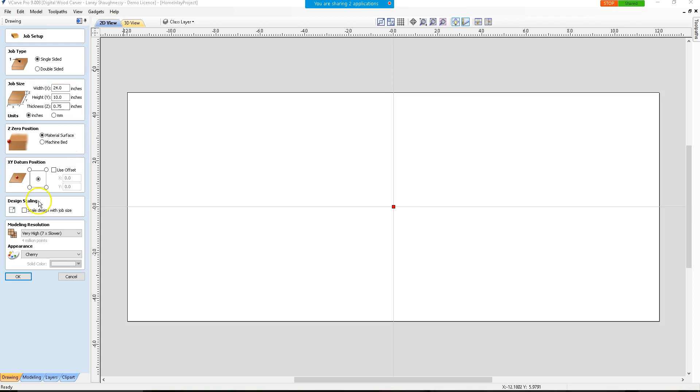So you'll be creating two separate projects for that male cut, but everything you're going to see in here, you're going to see me creating them side by side. I'll keep reminding you guys of how we'll create that second project, and I'll show you how we can do that. So I'm going to be working off the top of the material and off the center. Let's go ahead and click OK and get into here.

So there are two ways of creating inlays, and let's move over to the toolpath operations, because these are the toolpaths we're going to be working with. We have the inlay toolpath for your traditional style inlay, and this is called the auto inlay toolpath, and I'll explain to you why it's called the auto inlay toolpath. But we also have an option of doing what's called a VCarve inlay. A VCarve inlay gives us the opportunity to get really nice detail and really sharp points on our design, and it uses a V-bit, unlike a traditional inlay that would use a straight bit.

So let's pop back over here, and let's talk about why the auto inlay toolpath is the way to go when we're doing inlay. So I'm just going to create a letter here real quick, and we'll just do the letter H. Make it about 2 inches tall. Make that a little bit bigger so you guys can see what's going on here.

Okay, so let's imagine, and I'm going to make a copy of this. While I'm in transform mode, I'm holding down the control key, and I'm going to come in here and just drag a copy off to the side. And so the one on the left will represent our male part. The one on the right is going to represent our female part. And the one thing that I want to show you is, if we were to think of this, we're cutting a part out and we're cutting a pocket, right? We're cutting a profile cut and a pocket.

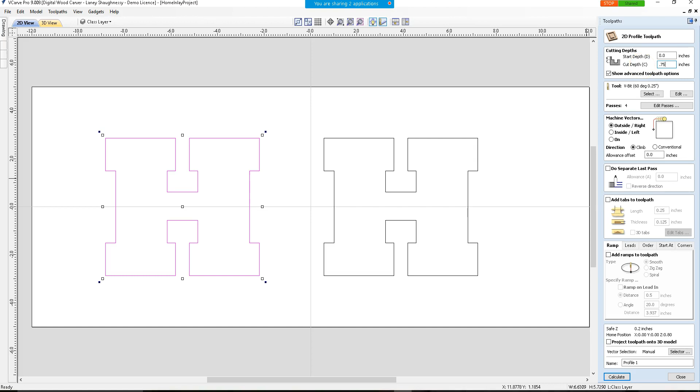The only problem is, if we just use the regular profile and pocket toolpaths, we have issues because our router bits are round. So let me explain to you what I mean by that. We have these nice sharp corners here on this H, and if we were to carve this out, on our inside corners here on the H, here, and here, we're going to have a radius. So if I were to create just a profile toolpath on this, and let's cut all the way through my material, and let's use a 1/4 inch end mill, that's fine for this.

Oh, hold on. The screen went black. Are we still grayed out? Screen is black. All right. Hold on a second.

Stand by, guys. Let's see here. Load. Are we still gray? Other than the two little gray boxes... All right, still grayed out. Okay. So I'm just going to do a... We back? Are we back in business, everyone? Okay. Let me move a couple of things off my window here. All good. Okay, great. Thank you for letting me know. If anything like that ever comes up, definitely jump up and tell me. All right. Stand by. Let me grab a couple of more things. Okay, so we are good to go. Everybody can see us now.

What I was saying was, if we were to just simply use a regular profile toolpath and a regular pocket toolpath to try to create this inlay, we would have major issues. And what I mean by that is when we do a profile cut and we're cutting outside an object, if this was my male part here, I'm going to get sharp corners on the outside corners, but on these inside corners here, like I have 4 inside corners on this H on these 2 lower parts, they would be rounded. And let me demonstrate that.

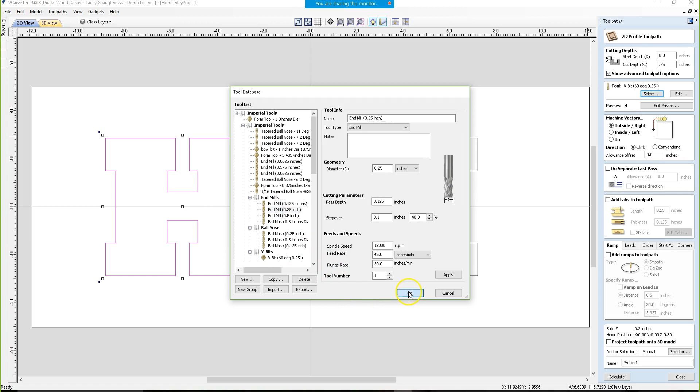So if we go through my material, and I'm just going to use a 1/4 inch end mill, outside of the cut, and I'm going to keep all the default parameters here and just calculate this. And let's go into straight on view. If I were to preview this cut and zoom into it, we can see that on these inside corners here, they get rounded because of the radius of the router bit. And that would cause us problems with fitting in to our female.

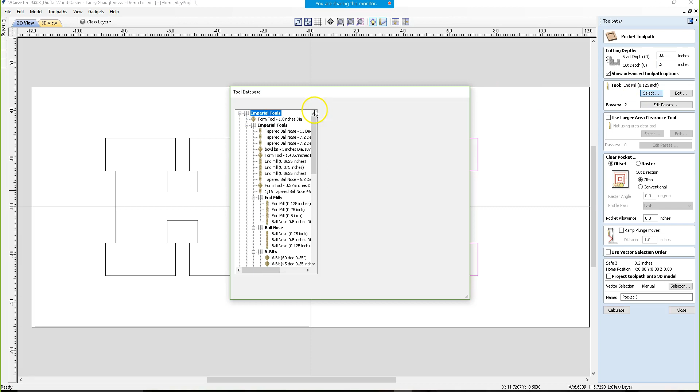So let's create that female pocket just using the straight pocketing toolpath. And this one will go 0.2 deep. Always use the same bit that you cut your male with. So I'll use a 1/4 inch end mill. And I'm going to just keep the default parameters here. And if we previewed this toolpath, let it finish pocketing out to that depth. Should have done it in one pass. You typically want to do it in one pass so you don't have a step down.

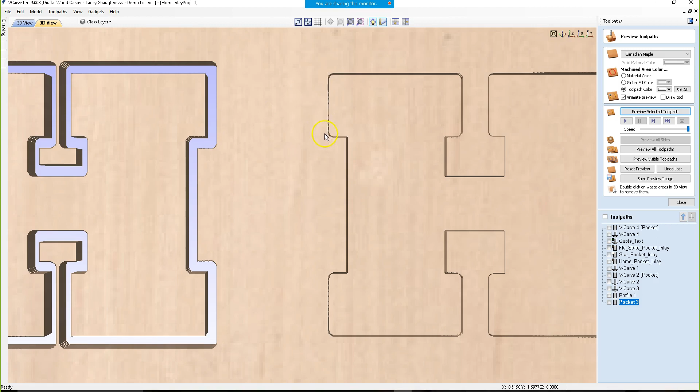But now if we look here at the female pocket, we have these sharp corners. So as of now, we have a mismatch. And then our outside corners, which are square here on the male, are rounded on the female. And so it's a mismatch. Well, we have the fortune of having what is called the auto inlay toolpath operation. That's this icon that's on the top row of your toolpath operations. And the auto inlay allows us to create our male and female part, and it takes into account and adjusts for the radius of the router bit.

So if we go back and create our straight now using the inlay, notice I have 4 options here. For the male part, we have a straight and a stepped option. And for the female pocket, we have a pocket and a hole. Now I'm going to just talk to you about the straight and the pocket right now, and then we'll come back and talk about the step and the hole, because that actually is a whole other neat little creative thing that you can do, and we'll do that one in just a minute. But let's start with just the regular straight inlay.

And so we're going to click our male inlay, and again we're going to cut through the material, and of course I've got this material set at 3/4 of an inch. I'm going to use the same 1/4 inch router bit, 1/4 inch end mill. Outside of the cut, I'm going to keep all the parameters the same, and we're going to calculate this. Now, if we were to preview this toolpath, we can see that once it cuts out, if I zoom in and move over, the toolpath has accounted for that rounding of the corners instead of getting sharp corners.

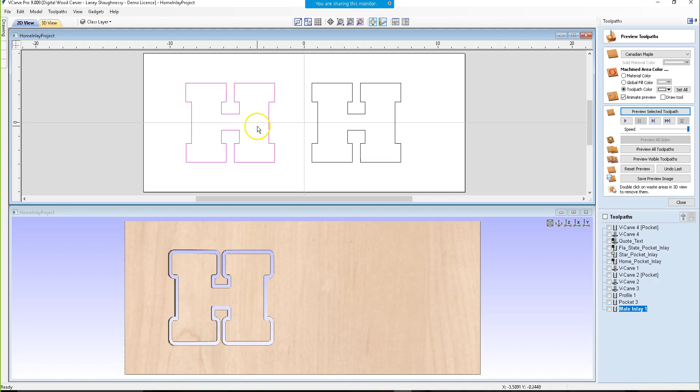So now we have that radius all the way around, and this is best viewed if we look at it in our split screen view. So if I go into split screen here, and if we look at this toolpath in a solid state, bear with me a second, let's go back into preview there, you can see the toolpath and where it's nipping off this corner here and coming in. It's showing you the radius and everything. So it's accounting for that 1/8 inch radius on a 1/4 inch bit already.

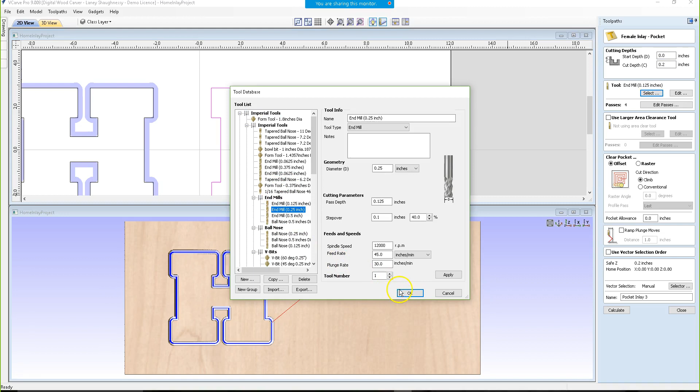Now let's go ahead and go through and create our female inlay. We're going to do a female pocket. And I said male pocket earlier, I meant male profile. Sorry about that. Again, we're going to go 0.2 deep using the same 1/4 inch end mill. I'm going to leave the default parameters the same here, and we're going to calculate that.

And now if we look at the 2D view, you can see this blue area, by the way, is a solid state. So if you have version 9, if you ever see those arrows and lines on your software showing you the toolpath, that's the wireframe mode. You can view solid mode too.

But if we look in here now, we can see that rounding of the toolpath. So we're going to end up with that perfect fit. It automatically accounts for the male and female. It knows that we're trying to get this part into that part, and it accommodates it so we can have a perfect fit.

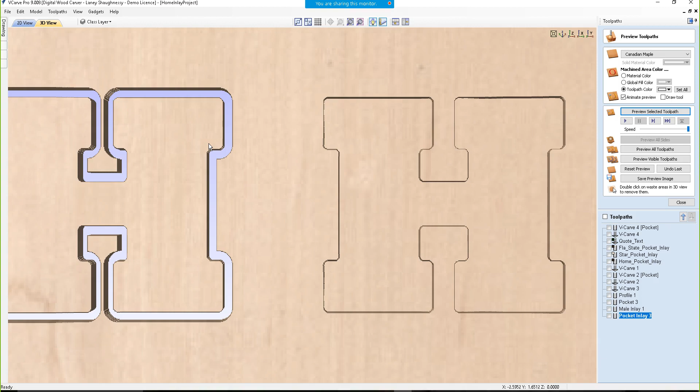Now if we preview the toolpath down below, I'll maximize my 2D view again once it finishes cutting out that toolpath. We can now see that on our outside and inside corners and everything, we have a perfect match. Now, when it comes to using the auto inlay toolpath, it's going to be a very tight fit depending on your machine. Now, you guys are all Digital Woodcarver customers.

Inlays, accuracy, and how tight the fit is all depends on the accuracy of the CNC. On the Digital Woodcarver, you have a tolerance, which really doesn't mean much to you, of 3/10,000ths of an inch. You have an accuracy, if you were moving back and forth, where it lands in that same spot every time. You have a resolution of about 5/1000ths of an inch, but that 3/10,000ths of an inch

is pretty tight. But tolerance isn't the word, it's resolution. I'm sorry, 3/10,000ths of an inch resolution. That doesn't really accommodate anything. There's nothing we can equate that to in a project. Tolerance, like if I were to set my XY zero and move the machine to one end of the table and come back, you have an XY tolerance of about 0.005 of an inch, which is pretty tight.

But some machines like the X-Carve, where the tolerance is not tight, couldn't get away without having to create an allowance. And what I mean by that is, if we look at this toolpath here, we have the option on either the male or the female of creating an allowance. Typically, for the Digital Woodcarver, I would go with a 0.005 or 0.010 of an inch allowance.

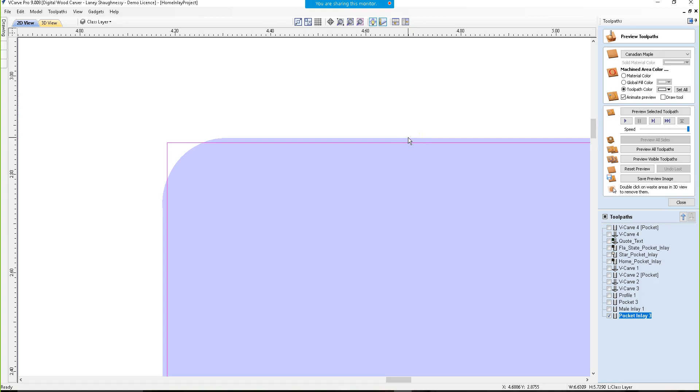Your allowances on your female are going to be outward, and the allowances on your male are going to be inward. So it's one or the other. Typically, you do not put an allowance on both. I'm a big advocate of putting the allowance on the female and not the male, because rule of thumb, you always cut your male part first, so that while the female is cutting, you can come over to your table and do a test fit.

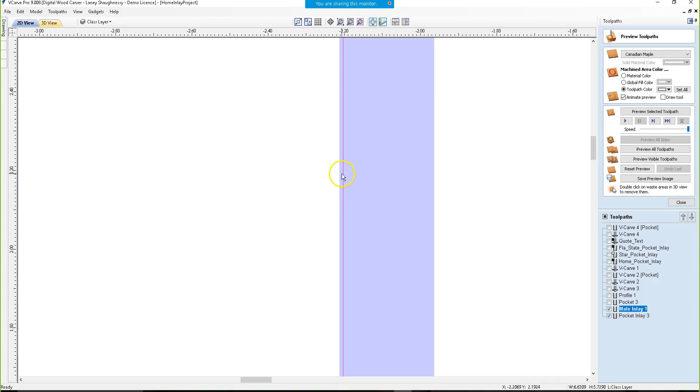If the test fit is too tight, then you can add that allowance, make that pocket a little bit bigger, and run that toolpath again until you get that perfect fit. And notice on the male here, we are actually making the part smaller with the allowance. So you can either add the allowance to the male or the female.

I am a big advocate of using the allowance on the female part, because you cut your male first, bring it over to the table while you're cutting your female, and when that female finishes cutting, do a test fit. If it's too tight, recalculate the toolpath, giving yourself a little bit of allowance. Run that toolpath again, and you don't have to run the whole toolpath. You can just run the last profile pass to widen it up a little bit.

Test fit again until you get that perfect fit. Once you get that perfect fit, and let's say our allowance is 0.010 of an inch, you can pretty much guarantee that's going to be the allowance you would use each and every time.

And so the allowance will help just kind of widen things out on that female, which is visually shown here in this 2D view.

Okay, now that being said, let's talk real quick about the step inlay. So let me turn these off. The step inlay is cool. I don't know if you guys and girls have ever seen a project. Basically what we would be doing, if you look here at the toolpath, if you can see this little icon, we'd be cutting a hole all the way through. That pocket would be cut all the way through our board, our material.

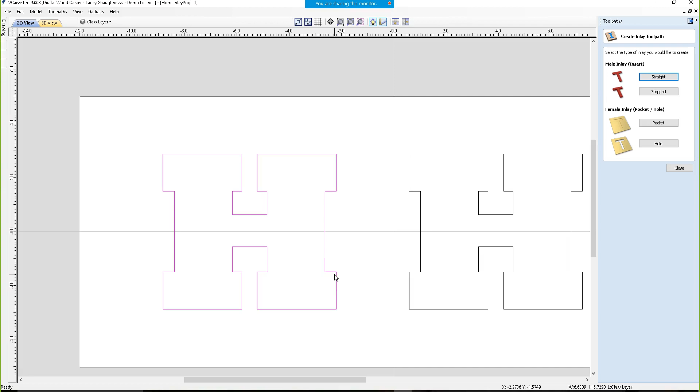So let's do that. Let's create a stepped inlay for the male side of this H, and my cut depth again is going to be 0.75, cutting all the way through. Now let's choose the tool. I'm working with a 1/4 inch end mill here. And by the way, your radiuses and all that stuff, it is bit based. For your smaller projects, a 1/8 inch end mill is what you'll typically be working with.

And typically you're not cutting a male part out of a 3/4 inch board. It's usually a thinner piece of material, because you're only cutting the female pocket to about 0.2, a little under 1/4 inch. But let's go with a 1/4 inch end mill. Now we have a new window here for this step. It's asking us what our step depth is going to be, and it's probably hard to see, but in the little graphic here, the step depth is from the top of our board down.

And one way that we can do that is, I usually leave about 0.2 of an inch or so of a lip. So I can use a shortcut, and I can say D, which is the depth of my project, and I can say times, oh wait, hold on, there's an equation. D for my depth minus 0.2 equals, oops, syntax error.

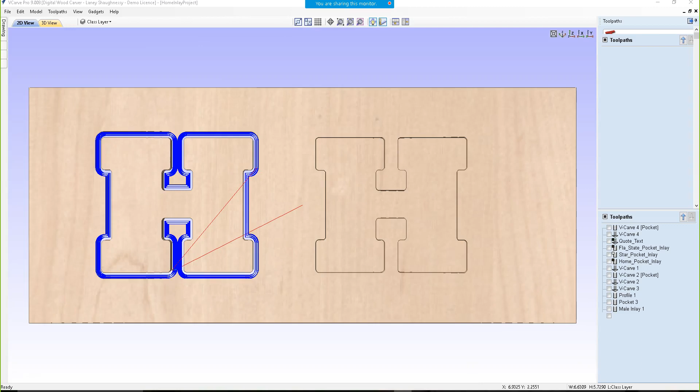I'm an idiot. Everything can happen when you're live. I'm going to take a look at what that equation is. Gosh almighty.

There are, by the way, options for, where is it at? View, help. Right here, keyboard shortcuts, which is what I'm opening. It's a list of all of the keyboard shortcuts to show you what they are. But anyway, let's preview this selected toolpath. I tried to be fancy and show you a neat little trick, and I didn't even know how to do it.

Now notice what will happen. Watch here as it cuts this male. It's going to be quite a few passes. I've got my bits set for an 1/8 inch pass at a time with my 1/4 inch bit. I'm not aggressive with my bits, so give it a second to calculate that. We're almost done.

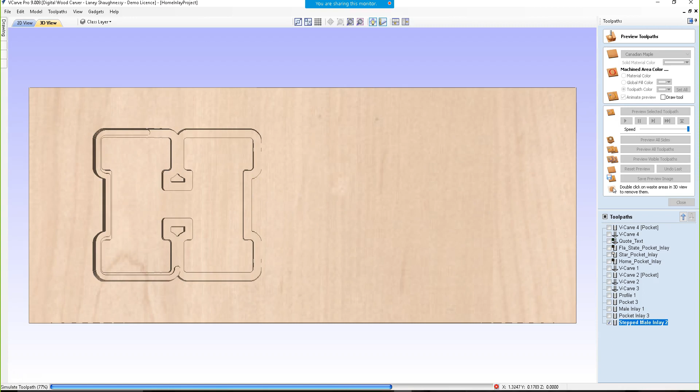All right. Now if I delete this and we take a look at this part, notice how it's created my inlay part, but it's left this lip. And the lip is so when it slides through the hole in the back of our project, where we're cutting out the female part, it stops it. It's kind of like a stop. It's also room for glue.

You'd put a bead of glue in there because it'd be glued in from the back. And you typically have this male a little bit thicker. Let's say if I was using a 1/2 inch board, then my male would be cut out of about a 3/4 inch board. So that way when it sticks through the hole, it's protruding above my board about an 1/8 of an inch or a 1/4 of an inch. It's just giving it that raised up contrast wood.

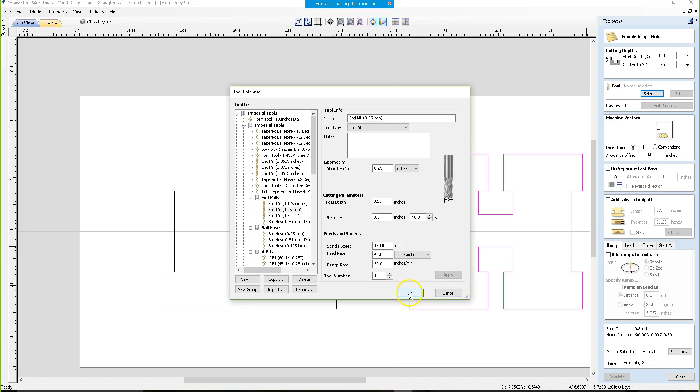So let's cut the female real quick. And with the female, it's a very simple hole. Again, we're gonna go all the way through my material. I'm gonna use my 1/4 inch end mill. And I'm gonna set this pass depth to a 1/4 of an inch, just to speed things up. We're going to be on the inside. No allowance right now, but again, if you need to make it a little bigger, put in that 5 thousandths or 10 thousandths allowance. And I'm going to leave all the defaults the same, and I'm going to calculate this.

And let's reset our preview. And now we can preview our female getting cut out, and I can get rid of that waste. And again, if we preview our male, we can see our 2 parts, and our male will fit inside of the female all the way through it, again being stopped by that little lip on the back. And it's a really neat thing. Signs for kids' rooms and all kinds of stuff. It's typically used with acrylics.

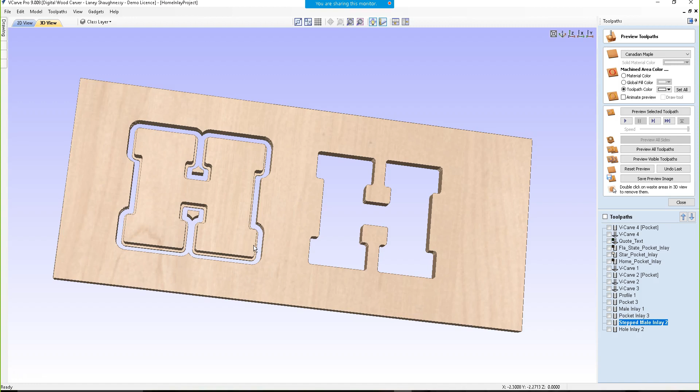Let's say that we were carving an aluminum or a wooden sign, and then we had some thick acrylic that we were going to backlight. We would cut the male parts out of that acrylic, and it would come in through the back, and then we would put LEDs and stuff and make a very cool looking sign. But that is our traditional auto inlay toolpath, just an overview of them. They account for the bit, because it knows we're trying to fit this part into this part, and it accommodates for the bit on both parts, so we get that perfect fit every time.

Now, stand by, because if you're asking me questions or anything right now, I do not have any of the windows open so I can view what I was trying to view. I cannot believe that I didn't know it.

All right, while that's doing that, let's go back in here and delete these. And let's open up a project that I've created. Now, one of the things that you're going to get out of this class, you're going to get a file of vectors for every state in the United States. Every vector outline for all the states. I'm going to provide that file to you as a gift, as a thank you. And this is one of the signs that I really like to make. The state itself is inlaid. I use maple. The state itself is pocketed out, and then the male is cut out of walnut. And then my star would be another piece of maple. And then my home is walnut.

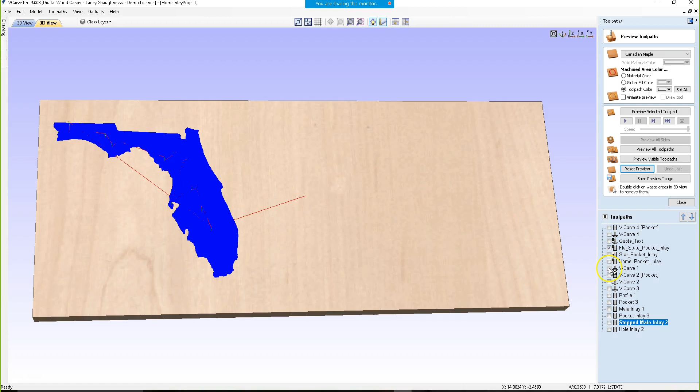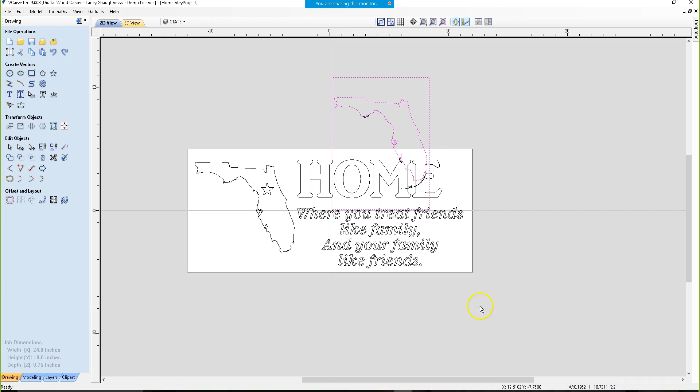we're going to move it to the class sign layer. Now notice I only grabbed the state. I didn't grab these little islands and everything because they're not going to be part of my inlay. So I'll just end up deleting those in a moment. But now we can turn that layer off and we're back in business.

So again, let's get everything out of here. So these images that come in, they're going to look like this. I'm going to F9 to center on my project. You don't need the outside frame, of course, so just delete that off. And you'll have all the states and vectors and all. Now, if we take a close look at this, you wonder how in the world is it going to inlay this little island or tributary or peninsula, whatever you want to call it, this little thing sticking off the state.

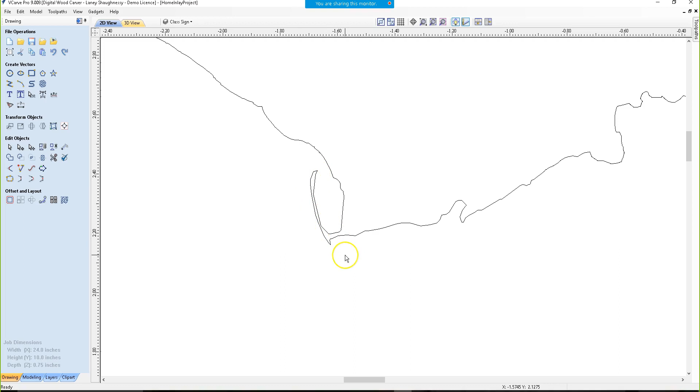Well, if I come in here and I create the toolpath for it, and I'll just use a regular inlay toolpath, straight mill, again cutting through my material, 1/4 inch end mill, and calculate. Actually, that was idiotic of me. I'm going to stop that. Wrong bit. I would not ever use a 1/4 inch end mill for this. For my state of Florida, I would use a 1/16 inch end mill, but an 1/8 inch end mill would do fine as well.

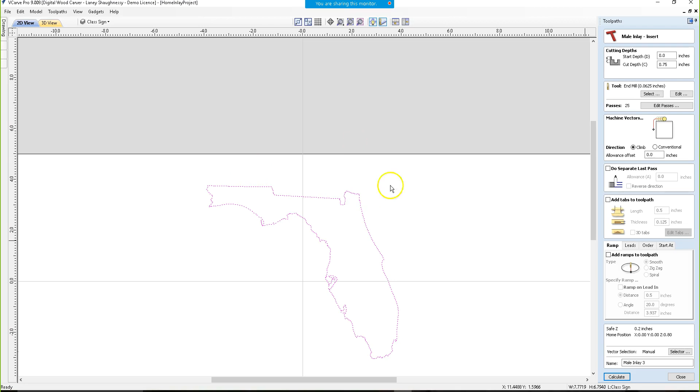So I'm going to do this in one pass. I'm just setting this as one pass to make things quicker for the demonstration, but I would not run my 1/16 end mill 3/4 of an inch deep in one pass. So I'm just going to calculate that, and this is just for one more time. Edit passes. 1. Set. Okay. Calculate.

It'll take a second to calculate that. It always, for some reason, takes me longer to calculate when I'm running a class. I don't know why. But let's reset our preview. And now if we look here, we can definitely see a better view of it in the 2D view. So let's actually go over to the 2D view.

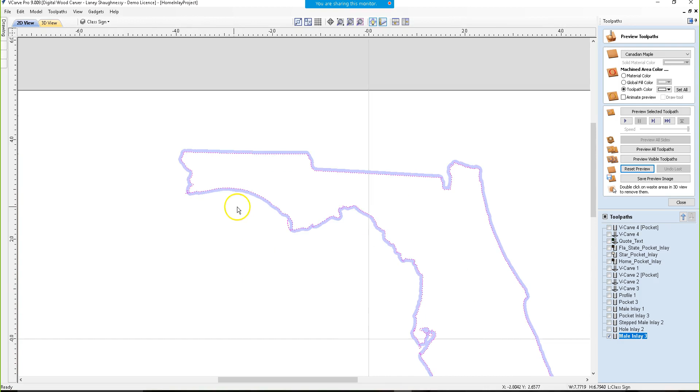And if we look here, you can see where it's compensated for the radius of that bit. So it's cut that peninsula off. Okay. So we're just going to get that rounded profile and everything. So if we look at our 3D view, you can see that peninsula is gone. So it automatically kind of accounts for that. Just keep that in mind.

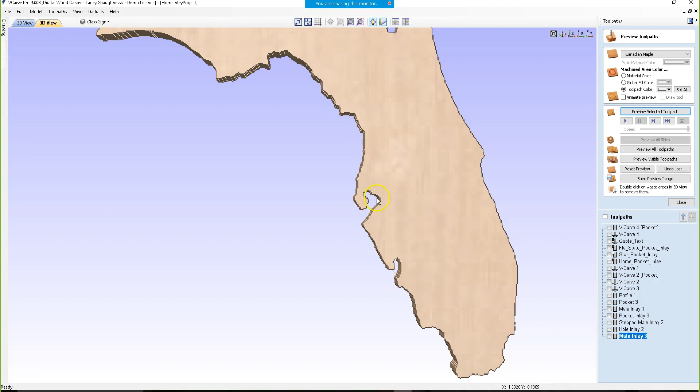Any little tributaries or whatever you want to call them, they're not going to get cut unless you have a micro bit to fit in. So if I were to remove the waste material, let's get it into full view so you can all see it. This would be my male inlay. And I still get good detail on the state and everything. But those little twigs sticking off, it's not going to cut. So just keep that in mind.

You're not going to get 100% exact on something that's so detailed as this. Now, again, we're still using the traditional auto inlay toolpaths. We haven't even covered VCarve toolpaths, which is completely different. So these states, basically what I did from here is I created my toolpaths, and let's go into full view so you can see what's going on.

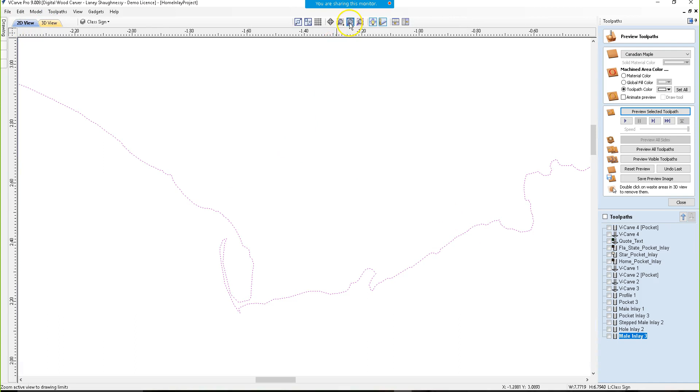I don't know why I keep clicking everything. Bear with me a second. Okay. What I'm trying to do is move this over to where it belongs. All right, now text. Inlaying your text. Let's go over and create some text. I'll just create the word home for this.

My computer must be struggling for some memory now. Gotta run. Thanks. I'll watch. Thanks, Ronnie. Sorry. Am I running over? No, we're still at 7:40.

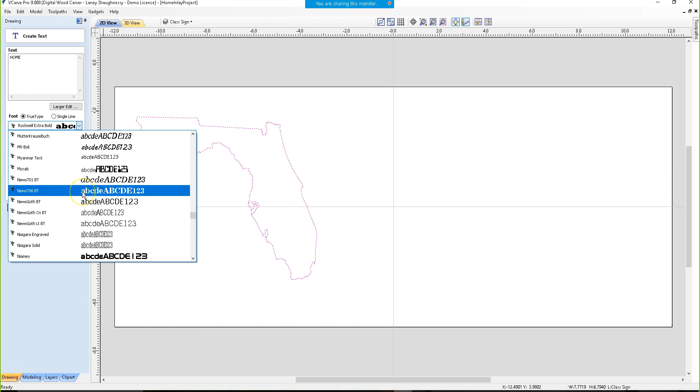Home. And for this tool, I will use... what's a good one to use here? And again, just know that when you're creating your sign, your sharp corners here are going to have a radius depending on the size of the bit. So if you want a very non-noticeable radius, use a smaller bit. Use your 1/8 inch bit.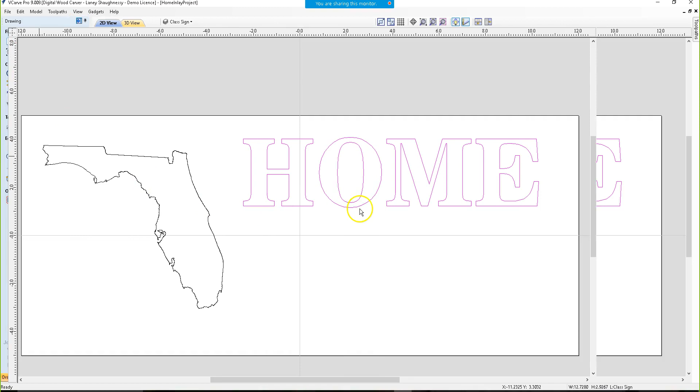If you use a 1/4 inch bit, then you're going to have a wider radius. But you do not have to go into this text and change all these corners or anything. That auto inlay toolpath will do it for you. So if I were to come over here, I'll just do the pocket for this one. Come in here and create that pocket.

0 start depth, 0.2 cut depth. I'm going to use an 1/8 inch end mill. I could stick with the 16th, but that's too small of a bit for pocketing. I could use a 16th and an 1/8 inch or a 1/4 inch, a larger area clearance tool. If you have a big area to pocket out, definitely a time saver, but that does include an additional bit change. So if I calculate this,

and if we reset our preview and preview it, we can see here that on the outside and inside corners, it's accounted for the radius of that bit, and it's rounded those corners off, knowing that we're about to try to fit a male part into that. So by a show of hands, how many of you got that, and we can move on to VCarve inlaying? Do me a favor and just raise your hand so we can move on.

All right. Todd or anybody, Larry, Ken, if anybody has any questions, if you ever want to try an inlay project, pick up the phone, give me a call. I have no problem walking any of you guys through your first inlay project, or multiple inlay projects. I have no problem being there to help you out. So let's clear that.

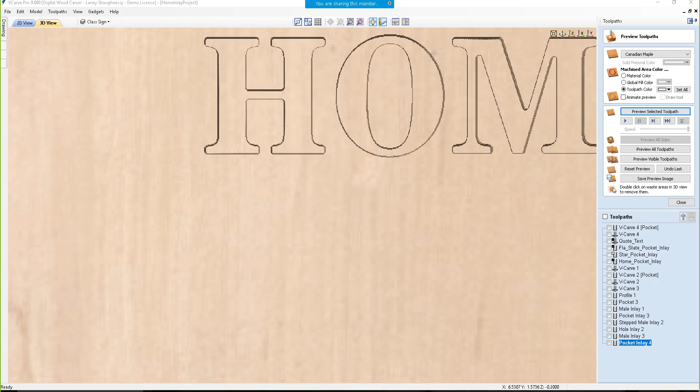All right, let's focus on VCarve inlaying for a minute. VCarve inlaying is very cool because now we are not limited. We don't have the radius anymore that we have to contend with. We can get very sharp corners. We can get very intricate in our detail. Notice on this owl here, we have some very sharp points, and we're going to be able to maintain that detail.

Now what you see here is I've got my female pocket on the left this time, and the male on the right, and notice that the male has this border around it. And again guys, I'm creating these male and females out of the same board. We would not do that. You would actually create a whole other project for your male, cutting it out of the proper thickness material and the proper size. You don't want to cut it out of a big board. Cut it out of a board that'll fit.

So if I were to open a second instance, right-clicking on my little Vectric icon down below on my screen, and open a second VCarve program, I would let it pop up here. Oops. Let me close some of these windows, guys, because we're having some lag. Okay. I would come in here, create a new file.

This file would be a... Oh, I am lagging, seriously. 10 by 6. And cutting it out of a, you know, my pocket is going to be 0.2, so I might be cutting this out of a 1/4 inch board, a 1/2 inch board. The thicker you go, the more you have to sand it flush. Or you have your CNC mill it down. I would cut this out of a 1/4 inch board,

and I can come in, click OK on this, and I can paste. Oops. I had the wrong one copied. Let's go back over here real quick. With that selected, I can copy it from here and paste it into here, center it onto my board, and this is what I would create. I'd create my male inlay toolpath and cut it out.

Even for the VCarve as well, because we're going to actually use the VCarve. This is the VCarve tutorial here. But when it comes to traditional, this is what you would do. You create a whole separate project to cut it out. Now, for my VCarve inlay, my project needs to be a little bit bigger. So I'm going to give myself a little bit of room, and I'm going to go 11 by 7.

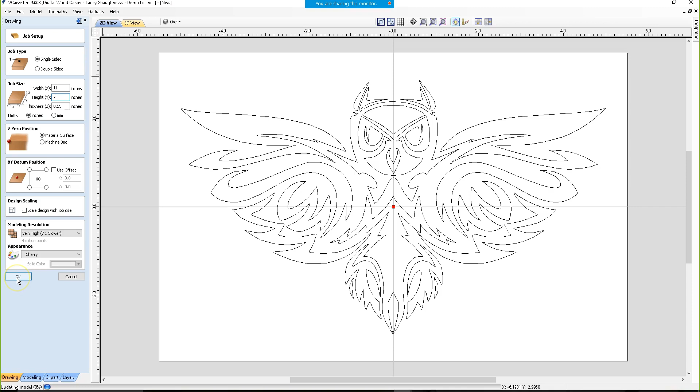Because I want to create a boundary, and I'm just going to draw a rectangle around this, snapping from one corner of my board to the other, drawing that rectangle border. And I want to create a boundary around this because when a VCarve cut gets done, it leaves a male behind.

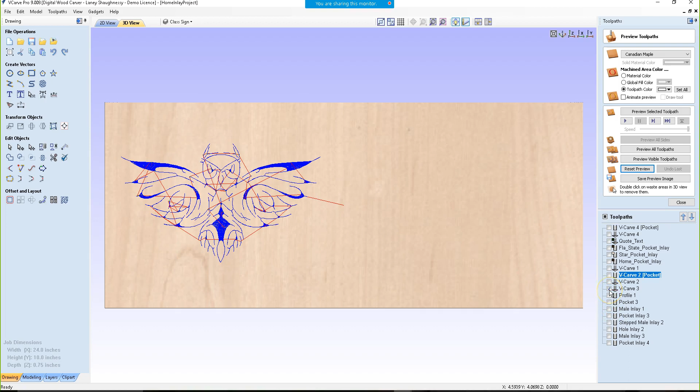So let's see if I can give you an example. I don't have a visual. I do have a visual. What am I, an idiot? I created the toolpath. Let's go over here. Sorry. I don't know why I got flustered there for a second. VCarve. Pocket. Let's see here. This is my... No. Oh. Bear with me a second. All right. This isn't the owl, but don't get confused.

Preview selected toolpath. When we have that boundary around our male part, the back of the board is still going to be attached. It'll basically still be attached to that board. And when it VCarves, of course we'd be carving this out of a smaller board, but we make sure that we have no lip around here. You take it to a table saw or a bandsaw, cut it out, because this whole backer and everything is going to flip and fit onto and snap into your female part.

And if I can pop open a window real quick, let's see if I can do this. I'm sure many of you guys and girls might have seen what a VCarve inlay looks like, but let's see if I can get a picture of it. VCarve inlay. There is a PDF tutorial. This method of VCarve inlay was created by a couple of guys named Paul Zank and Damien Durant.

And they actually have a full PDF, which is here, this VCarve Inlay project, that is printable. It's 13 pages that walks you through all the steps. The only thing is I think the PDF actually has a typo because of their cut depth and start depths, and I'll show you that in just one second, but I want to show you... I should have had all these windows open and ready for you guys.

And while that's loading, when cutting an inlay, would you adhere the veneer to a wasteboard or sandwich it between sacrificial?

Debbie, if you're doing a veneer, it's going to be that thin, but our inlay pocket is almost 1/4 of an inch thick, 0.2. You can go 1/8 of an inch. You can go 1/16 of an inch. If you were going to do it with a veneer, then yes, you would sandwich it between 2 boards so it doesn't tear out. But the male is going to be actually pretty thick, especially on a VCarve inlay.

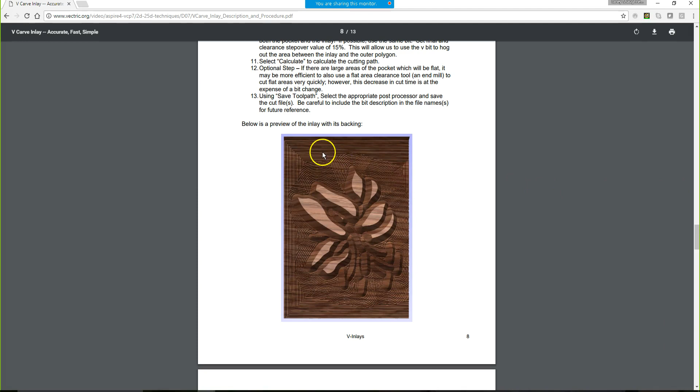Okay. So when that male gets cut out, it stays on the backer, and all the parts remain intact. It doesn't cut all the way through like you would think, because when these 2 parts come together, the male and female are going to snap together, you'll hear a nice little satisfying click. They click together very nicely. And so when they're done, there's a space.

If you can see on page 8 here, this cutaway they did, there's a space between the male part and the female part where you can run a handsaw or a bandsaw to separate them. When you separate them, you would just sand that flush in your female, leaving you with your inlay. So that male backer is not going to get cut through like it would with a traditional inlay. You're not cutting the male all the way out.

So if we come back over here with our owl, I want that border around, and one very crucial step is I need to mirror the male, because think of 2 slices of bread coming together. Those 2 parts coming together, we need a mirror copy of it. So I'm going to just flip it and mirror it. You didn't see any real movement there, just a quick shift, but it is now a mirrored copy.

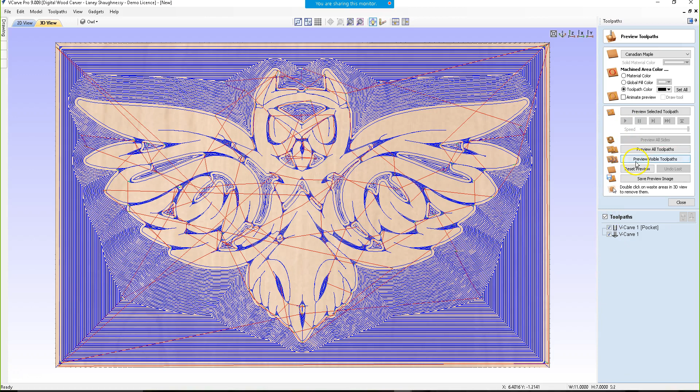I'm going to use a 60-degree V-bit for this. You don't have to use a flat area clearance tool to flatten all of this area out. The V-bit will do a good enough job, but it makes it a little bit longer run, so I like to use a flat depth, and I can calculate this toolpath. And if we were to preview this, you can see that this would be my male part.

And yes, Ron was asking, do you have to reverse the male image so that it'll fit in the female? Yes, you do.

So this is my male part, and notice on the edge of my board I have this little lip. I would cut it off with a chop saw, miter saw, run it through a bandsaw or my table saw. We just want to cut that lip away so that it's not there. And so this would be our male part. Now let's pop back over and create the female part.

And this is my female part. My male, remember, has the boundary around it. So if I calculate VCarve Inlay, the female toolpath is going to have a start depth of 0 and a cut depth of 0.2. Basically, with the 0.1 and 0.1 of the male, we are splitting this 0.2 depth in half. So our female goes to a depth of 0.2. Our male starts at 0.1 and goes to 0.1. Again, I'm using a 60-degree V-bit. I do not need a flat area clearance tool on this.

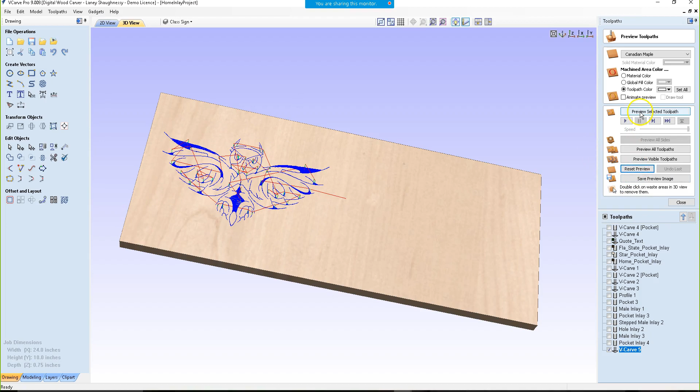And if I calculate this, reset our preview and take a look. We've got our female here. The reason I don't need a flat area clearance tool is because the V-bit will flatten that area out as well as it needs to be. That room down below is for my glue. It's going to be hidden. So I don't need to waste time changing a bit for that.

So my female cut, and just for kicks and giggles, this has already been mirrored with the boundary around it. Let me quickly create the male here so you can see them side by side. VCarve toolpath, 0.1 start depth, 0.1 cut depth, 60-degree V-bit. I will use a flat area clearance tool on this.

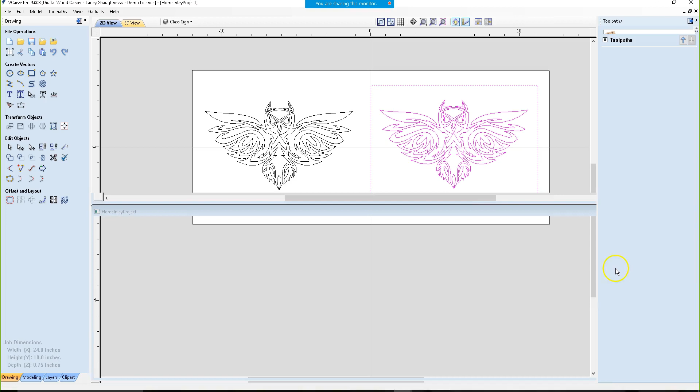And calculate. If we preview the visible toolpath, you'll see the male. And so what the VCarve method does, and see this angle. By the way, 60-degree V-bit, 90-degree V-bit, 120, doesn't matter what angle bit you use, the same bit for both the male and female. I really like and prefer using the 60-degree V-bit, but in that PDF, and I'll provide a PDF in the project files too, they use a 90-degree V-bit, but it doesn't matter what angle. You just use the same bit for both the male and female.

And why the VCarve Inlay is such a great method is because, one, we get these nice sharp detail corners. We don't lose or sacrifice any detail by the radius of the bit. And the angle of that cut, when those V walls fit together, it will push down and, like I said, give it a nice little satisfying snap together until those walls meet, and it will stop. And that's it. And it gives you a nice, clean VCarve inlay.

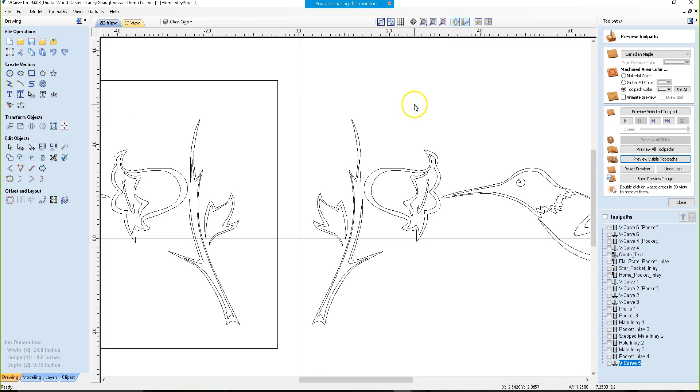And you're really not limited on the type of projects that you would inlay with a VCarve toolpath. With traditional inlay, we can't have a project that's too detailed. So for instance, if I were to turn off the owl here and show you our hummingbird, notice on this hummingbird we have some very small lines. First of all, it's very thin, very small to begin with. So we're going to get some very thin detail in here.

If I was doing a traditional inlay, I wouldn't be able to do it with this, because I would have to have a very small bit, or else it's going to cut this project back to where that bit can fit. Well, with a VCarve inlay, I have the ability to create this detailed project. So again, female pocket, the male is mirrored with a boundary around it. The boundary doesn't have to be a rectangle. You can just draw a line, you're just outlining it. Just give yourself enough room so the bit can get in between the design and that outline to flatten it out, but minimize your waste.

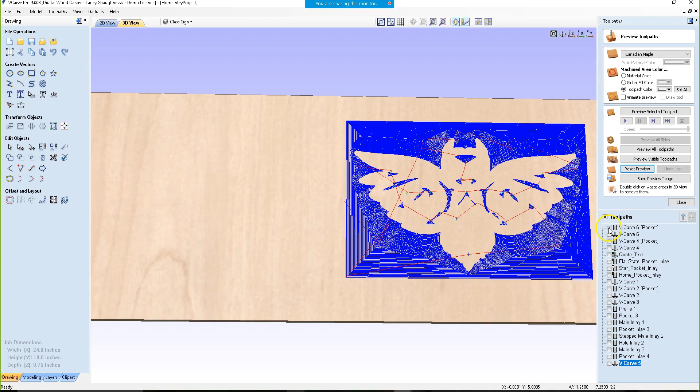But if we were to look at this hummingbird project, that's my owl, that's my Florida State, there's the hummingbird. There's our female pocket and our male. So we can get really nice sharp detail on these leaves and stems and everything.

All right. So, any questions? This will be best going into Q&A right now, because I can demonstrate better if there's any questions or any type of project. But just so you know, as far as your vectors, you can get vectors from anywhere, like your images, and when you trace bitmap to VCarve, if you're VCarving this, it pretty much could be inlaid. You can't get too detailed, but you know what I mean. So let's see what we have for some questions.

When you snap it together, I'm guessing you glue the female part first. After it sets up, could you run it through a planer and remove the excess? Well, you could, absolutely, for sure. I typically, if we look at our 3D view here, put the glue on the male. I'm worried about glue getting around my background here, because this is my project board. And again, this would be two separate boards, by the way. But I'm not worried about glue getting here, because all this backer board of the male is getting cut away.

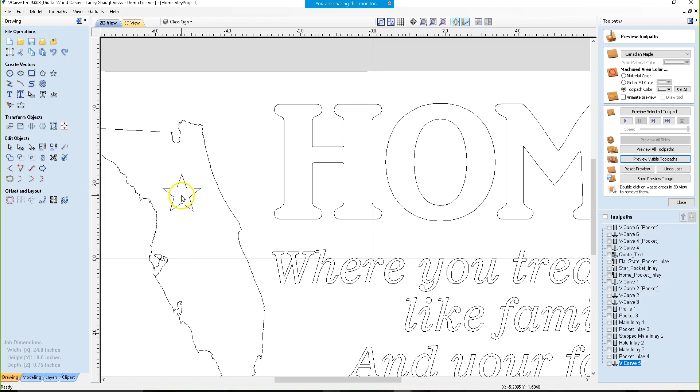vector here, a star. And now if I did the traditional inlay on the star, my points would not be pointed. They would be rounded based on the radius of my bit. But I could do a VCarve inlay on this star and get these nice sharp corners. So I could actually do a traditional inlay and a VCarve inlay. And some people prefer to just do the VCarve inlay for every project they do. I mix it up. It's just kind of a case-by-case basis.

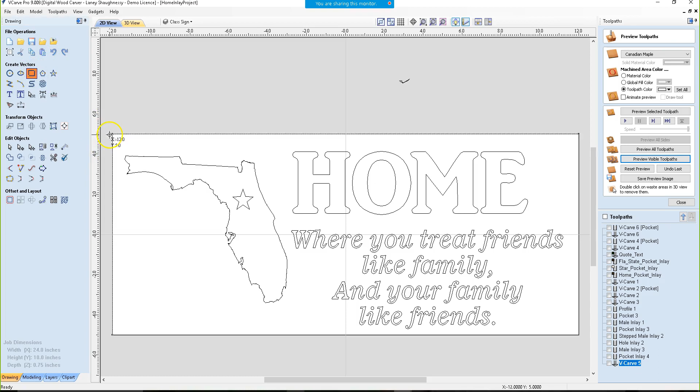How would you set a roundover on an edge? Good question. This, by the way, guys, and Larry, correct me if I'm wrong, we're not talking about inlay because you wouldn't do a roundover, but on the edge of your board, if you wanted to just do a roundover on the edge of your project board. So what you would do is, let's zoom out so we can see what's going on. We're going to create a boundary for our project board.

I just drew a rectangle. Using the rectangle tool, I snapped to this corner, held down my mouse, pulled it over, snapped to this corner to create that boundary. And now the key thing is you have to add a roundover bit

to your tool database. Thank you, Andy. I appreciate it if you're still with me.

And now the Vectric tool database does have a roundover defaulted in there, a 3/8 inch roundover, but you might not have a 3/8 inch roundover, right? So we've got to create that roundover. Let me delete this. So let's say I have a 1/2 inch or an 1/8 inch roundover or what have you. I'm going to draw that radius. So if I have a 1/2 inch roundover, typically when you say 1/2 inch roundover, it's referring to the radius.

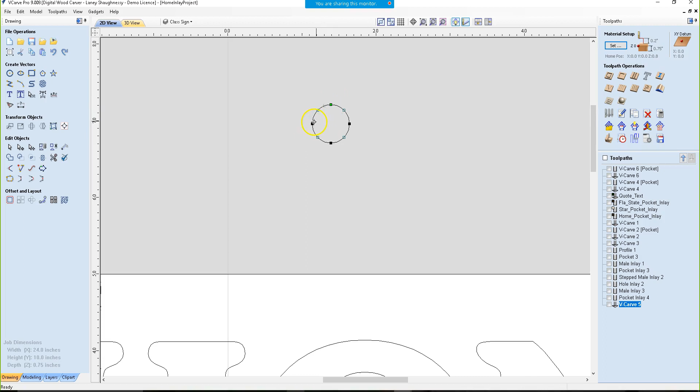So I want to make sure that my radius is 0.25. There we go. And I'm going to go into node editing mode. And we need this top right corner of this circle. So I'm going to cut the vector here and here. And I'm going to delete the rest of that circle. And this is going to represent my roundover.

Now my roundover bit would typically have a little bit of a flat area like where a bearing would be, or a cutter. So measure your bit and find out how wide that bit is, where it goes from one side to the other. You need to know what that is. And we'll just create, oops.

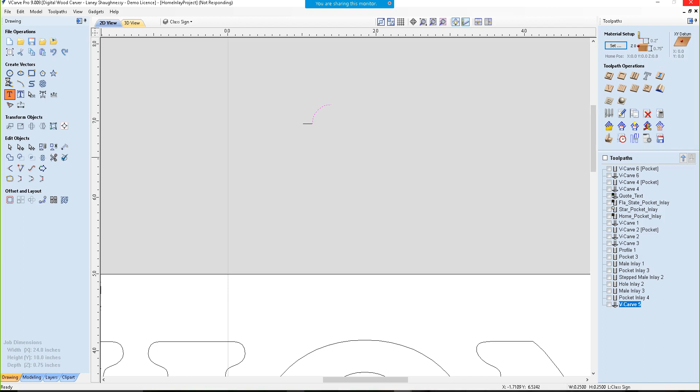All right, once I have the profile of my roundover drawn, I need to join those 3 lines together. I have 3 open vectors, I need to join it as one. And with that selected, I will now open my tool database. Over here, it looks like 3 router bits in the tool operations side. I will come down to New and click on Form Tool. And when I do, it will draw the bit out.

And now it's going to put in the diameter of the bit. The diameter is not our radius, by the way. That is just the width of that router bit. Putting it in there, it's going to fill in a pass depth and a recommended pass depth and a step over. And then we're going to come in here and put in our speeds and feeds. So 50 and 20. Click apply. I could actually run up to about 75 on this because I'm just doing a roundover.

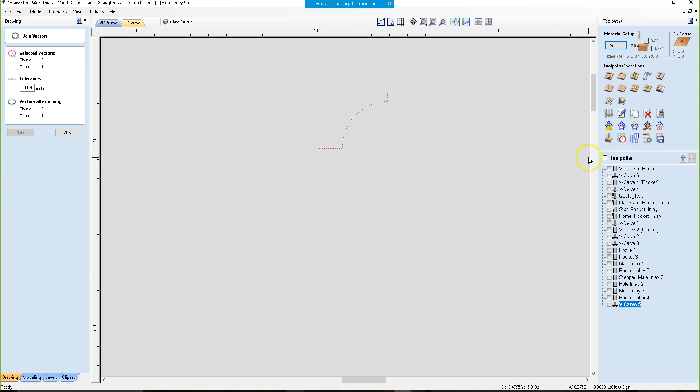But now we have that tool in our tool database. You have to add those form tools, those specialty form tools, your ogee bits, your roundovers. You got to draw those profiles. And sometimes you can find vectors of those profiles in different places and everything. But you got to draw out that profile to add it to your tool database.

Now, if I come over here and let's go back to our project, grab that vector and I'm going to do a profile toolpath. I want to cut only 1/4 of an inch deep. I'm going to choose my roundover tool. And I want to be on the outside of the cut, but I will be setting an allowance.

So right now, if I did it on the outside of the cut without an allowance, if I calculate this toolpath, oops, let's select our vector. If I calculate this toolpath and reset my board to a blank board, if we preview that selected toolpath, you're not going to see anything happen, right? Nothing's going to happen because it's got the bit on the far outside.

So I need to create an allowance, an offset allowance. And that allowance is going to be a negative. I want to go in. And I want to go in probably, I don't want to go in half my bit. I'm going to go in 1/4 of an inch. Calculate. And if we preview that selected toolpath, you can see that nice roundover.

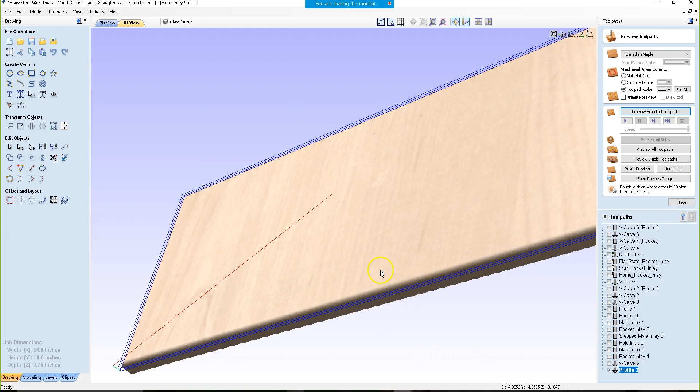So let's look in the 2D view at our toolpath here. We have to offset that bit. Otherwise the whole bit is going to be on the outside here. If we don't offset it, we're not going to get any cut. So that negative 1/4 of an inch gives us that nice roundover. And again, if I reset my preview and preview that cut, you can see that nice roundover that we're getting. Okay, that's how you would calculate and create a toolpath.

Who else lost audio? Anybody else lose audio besides Leonard? Leonard, is your audio back? Okay. We'll wait to see if Leonard's still with me. Okay, great. So you guys lost audio for a second.

Is there anything I need to re-explain on putting in a roundover bit in your tool database to create a roundover toolpath? The roundover toolpath, by the way, is just a profile cut toolpath. Just the profile toolpath. And again, you're going to choose your roundover bit. You're going to choose your cut depth. And you're going to choose your step over, your offset. And when I say step over, your offset allowance. Okay.

How do you set the Z for the roundover? You touch off your bit just like you do any other bit. You touch it off on the bottom of the bit, the very tip of it, the very tip.

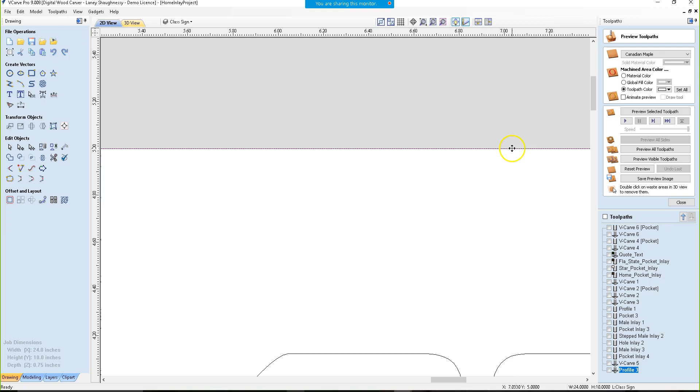All right, my vector line, it's hard to see that pink line and everything there. Let me turn this off, uncheck it for a minute. My vector line here is the edge of my board, you know, that I'm rounding over. And when I create the toolpath, I've got the toolpath set for outside of the cut, okay?

Well, if we look at our bit, it's not going to be in here. It's going to be on the outside of the bit on the one extreme or the other, left or right, depending on which side you're on. So it's going to have the outside of the bit cutting around that line, so it's not going to be cutting anything, right? So we have to bring that bit in so that we're getting that roundover cutting area. So we have to bring that bit in towards the wood more so we can get that roundover cut.

So again, looking at this toolpath in a solid state, that blue line, that's our tool, by the way. It's cutting on the outside. Well, I have to bring it in. So the allowance offset, I want to bring it inward. So it's a negative. I'm bringing it in a quarter of an inch, which is about the size of my radius. If I calculate that and we look at our 2D view, it now brings that tool in that quarter of an inch. So now we're actually cutting some wood.

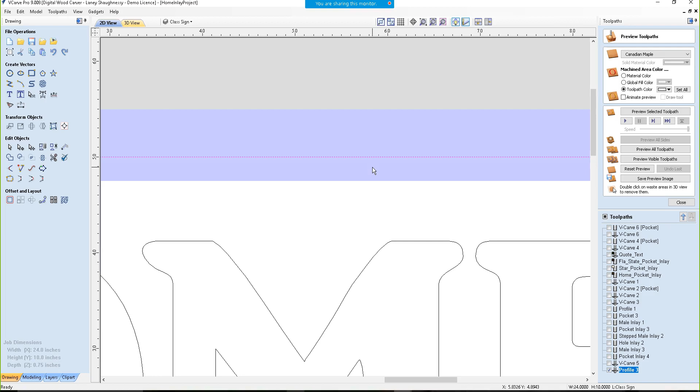Did that clear up the confusion a bit, Larry? Or still got a question on it? All right, Larry's okay. Yep, you got it. Okay.

And it's the same thing when we were doing the inlays, guys. If we were creating that inlay pocket with no offset allowance, then my router bit, if we come in here and look, it's going to be cutting up to my line. And then when I cut my male, it's going to be a very, very tight fit. You'd have to beat it in. We don't want to beat it in. We want a nice, perfect fit.

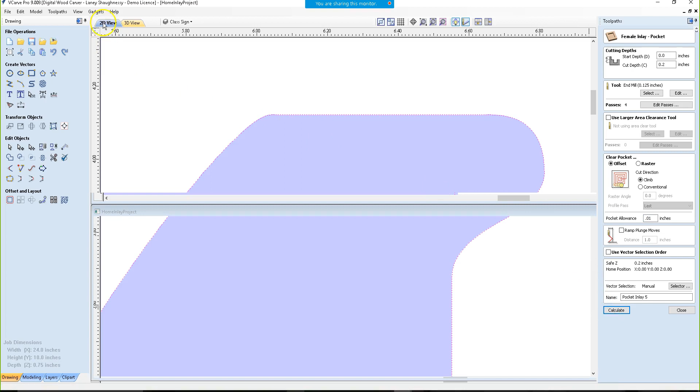So we will offset, give it an allowance of, you know, 0.010 of an inch, 0.005. And now, if we look at that, it's gone beyond our line, expanding this pocket by that much so that our male can fit in much easier. We don't want it to be sloppy loose, so you don't want to use a big offset when you're doing inlays. But you want just enough so you're not having to beat or force these things together. You want a nice fit. You want room for glue and all that stuff. You don't want a dry joint.

All right, so after cutting the roundover, you would run a separate profile cut to cut it out, separate from tonight's presentation. Is there enough difference to merit purchasing the version? Okay, two separate questions there, Debbie. So let's talk about that. Let's draw a rectangle here.

And I'm going to create a profile cut to do a roundover on it. And imagine this is just my board. I'm just working inside my work area because it's all I got to work with right now. And we want to offset inward 0.25. Negative, going in. Calculate that. Reset my preview.

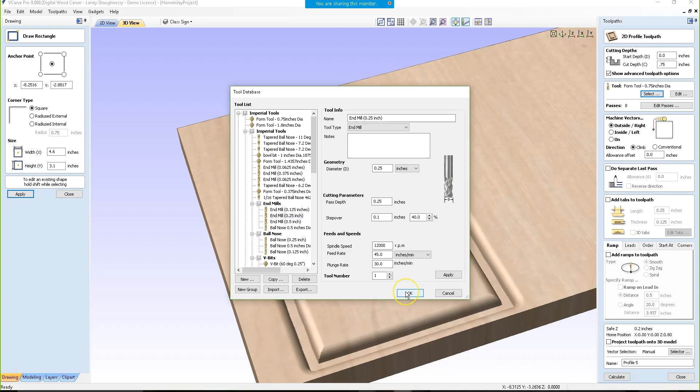And I'm going to be on the outside of the cut, and I'm going to calculate this. If we preview that selected cut, it will then cut that piece out. So you will create your profile cut for your roundover, and then a profile cut for your cut through. Okay.

All right. So, is the offset half the measurement of the bottom of the roundover bit? No, your offset, Larry, would not be half of the bit, because normally that bit has a flat bottom. If we take a look at that bit here, we have a roundover, and then many times the bit has a flat bottom on there. If I were to step over half the diameter of the bit, then now my bit bottom here is cutting in, and I'll get a lip.

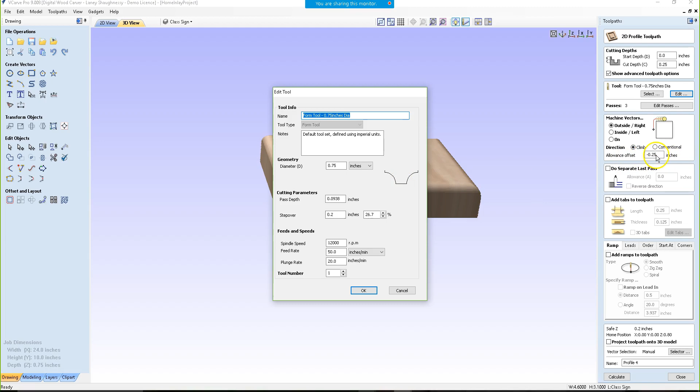So as an example, if I took half of that bit, which is 0.375, and I calculate that toolpath, if I reset my preview and preview the selected toolpath, ignore this, I would be getting this roundover plus my cut. So we don't want to step over half the diameter of the bit. You want just a 1/4 inch, which is basically the radius from the edge, 1/4 inch over, because it's a 1/4 inch radius bit. If it was a 1/2 inch radius bit, your step over would be 1/2 inch.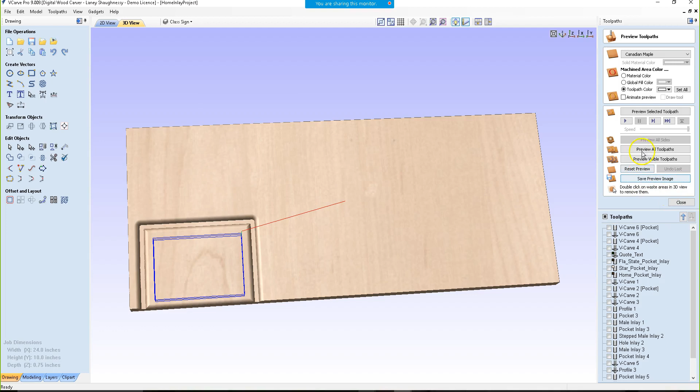If it was 3/8, then your step over is 3/8. Let me do the final profile cut on this board, so you can see what I was referring to. Profile. End mill, cutting all the way through. Preview this like that.

All right, so on my form bit, when I calculated, I went positive and not negative. You can tell that immediately. Negative. See what happened when I went positive? It went out further. Calculate that in, and let's preview that. Okay. This is what would happen if I went half the diameter of the bit. I'd end up with that flat bottom, instead of a nice roundover on the edge. Okay. And let's get that into full on view.

So that would be a no. I'd be mad at myself. Be like, oh man. And by the way, Debbie, I haven't forgotten about the 9 and 8.5. Give me a second, I'll answer that question.

Are upcut, downcut spiral and mortise bits the same as end mills, or can they be used as end mills? Okay, so an end mill is a router bit. A CNC bit is a router bit. It just depends on who you're talking to and what they call it. It's a router bit all day long. You either have ball nose end mills, VCarve end mills, straight end mills, upcut, downcut, or spiral cut end mills. An end mill is the same thing as a router bit or a CNC router bit, if that makes any kind of sense whatsoever. So when you hear me referring to the term end mill, that's your router bit.

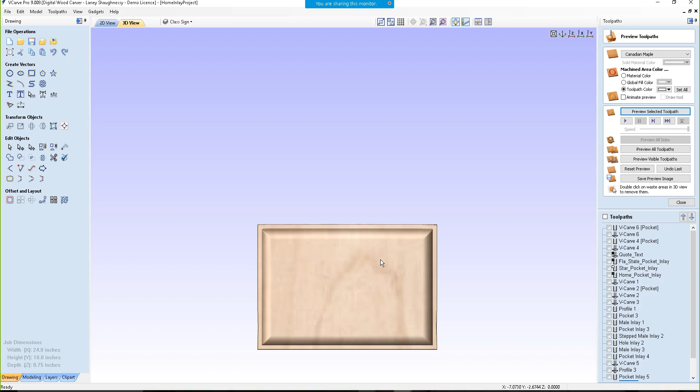These 4 bits do different things, and they react differently in wood, especially when cutting plywood. So I'll be making a short little video demonstrating the cut quality of each one. Typically in your hardwoods, you're going to use an upcut end mill. Your plywoods, if you're pocketing out a cut in plywood, you're going to use a downcut spiral. If you're cutting through plywood and both sides need to be clean and pristine, then you're going to use a compression bit, compression end mill.

But even with hardwoods, you can use downcut spirals as well. And even plywood, you can use upcut spirals, but you're going to get a lot of splintering. I never use an upcut spiral bit with plywood. Lionel, let me know if that explained it. But the word end mill is just referring to a router bit. So, yeah, upcut, downcut, and compression cut are different types of bit, just the flute direction, whether it's pulling the chips up or pushing them down or a combination of both. Those are 3 different types of bits, but all 3 of them are end mills.

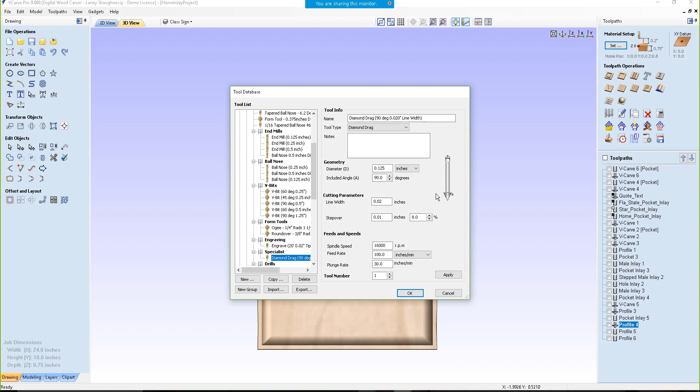Michael Rose: any types of painting, multicolor inlays? The details must be a bear to paint, merely mask or do something else in addition to. Oh no, on your inlays you would typically use a contrasting wood. So my project board would be maple. My inlay, if I'm doing multicolor inlay, would be a combination of cherry and walnut and bubinga, whatever, if I'm wanting some different types of colors and designs.

But if you're wanting to paint your inlays, maybe you're cutting all the parts out of pine and you want all those parts to be different colors, then you would not do the VCarve inlay method with that, because the top surfaces of those are all connected together. So yes, the male parts are cut out of different boards, on a different project board and everything. That's what I said.

It's probably confusing because you saw the male and female being cut out of this project board here. But you would set up two separate projects. You would have your project board where your female would be getting cut out of, and then out of a completely separate board and a completely separate file, you'd create a whole new project. You will be creating your male toolpaths, because you're cutting them out of completely separate boards, and those boards are typically contrasting in colors.

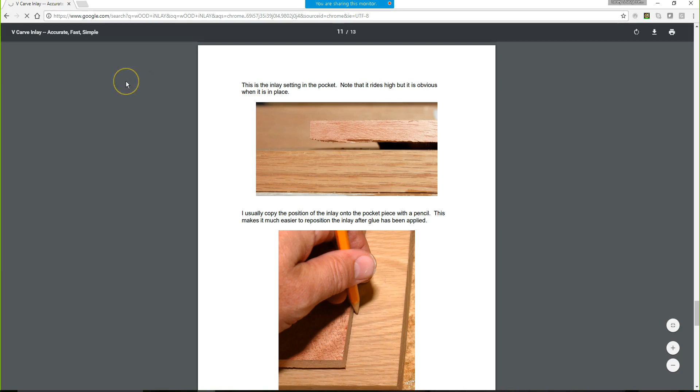Let's see if this will load up. Come on, Google. We're almost done, guys. All right, let's look at some images here.

And man, you can get super duper creative with inlays. All of these inlays, anything that you see right now, you can do on your CNC machine. Every single one of them. But your inlays are typically done out of contrast, and man, you can really enhance and do some beautiful projects.

One of the projects that I do is inlaid cutting boards. And if you guys ever want to see some really cool creative cutting board inlays on YouTube, MTM Wood, Mike Tango Mike, MTM Wood. That man makes some beautiful inlay cutting boards. But take a look at these as examples. A cutting board with a state in the middle of it, a nice decorative Japanese design and things.

Now notice these inlays are running straight through the board. They're actually gluing up different contrasting woods. But then the band work and everything is all cut on the CNC. MTM, yep, Michael, MTM Wood. He uses Vectric, he uses his CNC. He makes some beautiful, beautiful cutting boards. Oh my goodness. Awesome stuff.

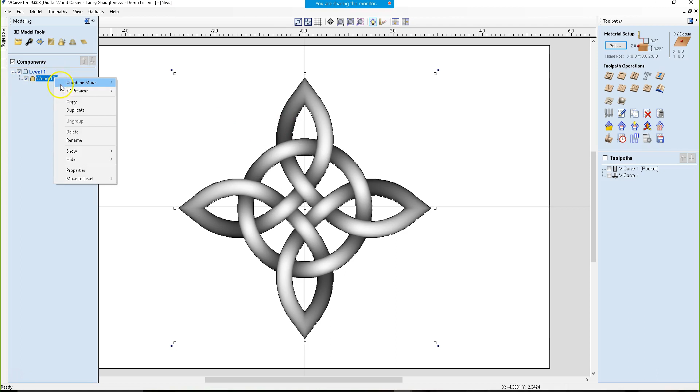Well, come into the modeling tab, this little icon right here, create a vector boundary around the selected components. Click on that. It draws the boundary around. Now I can delete the model, and there's my inlay vector. I can do an inlay on that, and it does very well. It's beautiful. Looks great in a project.

I can also VCarve this now. I don't have to inlay it. I can use this as a VCarve vector, and I just obtained it from tracing one of the models that came in the software. So think about that. There's a lot of little tips and tricks like that that you can do.

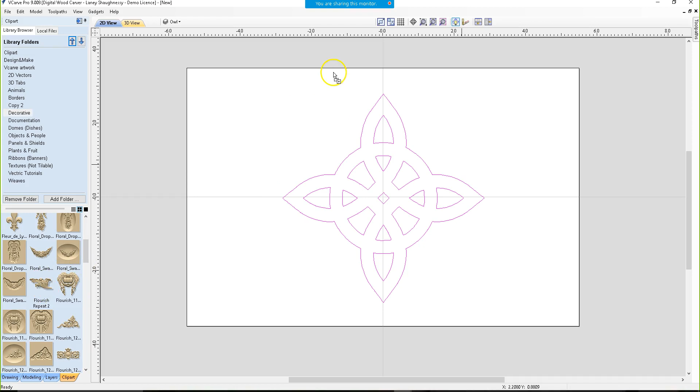All right, so if I move my model to this upper left quadrant here, and I come into my modeling tab, I can now turn on mirror mode, and I can go from left to right. Now you won't see anything in the 2D view, but when we look in the 3D view, we've created this mirror copy, and it automatically blends that together. Now maybe it's touching, so I have to move my model back a little bit.

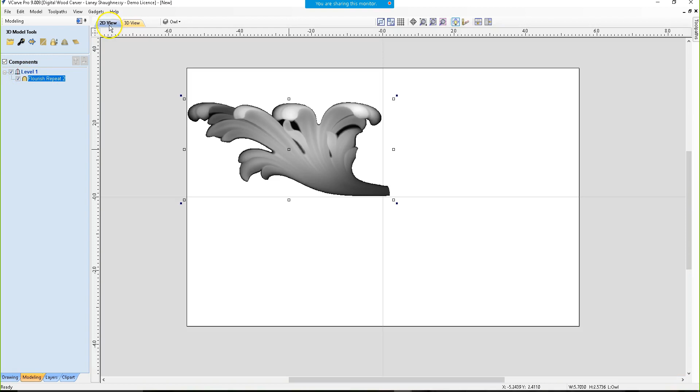And now let's say that I want to mirror top and bottom, on mirror mode, top to bottom. And let's bring this into where it blends together. Let's split screen so you actually see this. If I bring this model down, I can start to blend or mold those parts together.

I have 475 models in VCarve Pro that I could blend and mesh and mix and mirror to create some beautiful ornate things for mantles, headboards, the front of dressers, all that stuff. And so this little feature is totally awesome.

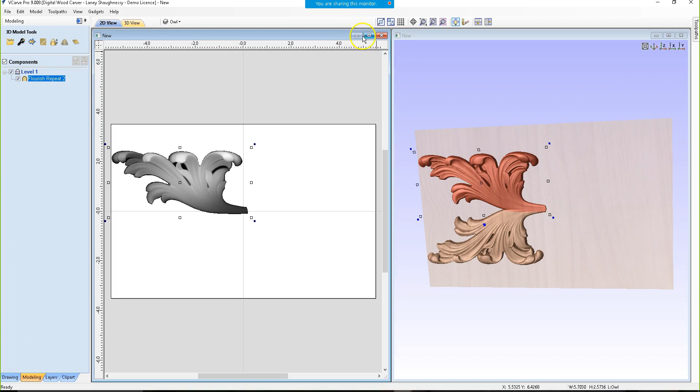When it comes to drawing, let's get out of this. Your new snapping features: being able to snap to other geometry. For instance, let's say that I have this circle here, and now I want to draw something down here in the bottom. Well, if I turn on my geometry snapping, and smart snapping as well, I can come over and wake up this vector. Let's close this tool, by the way. Oops. I can now wake up this geometry.

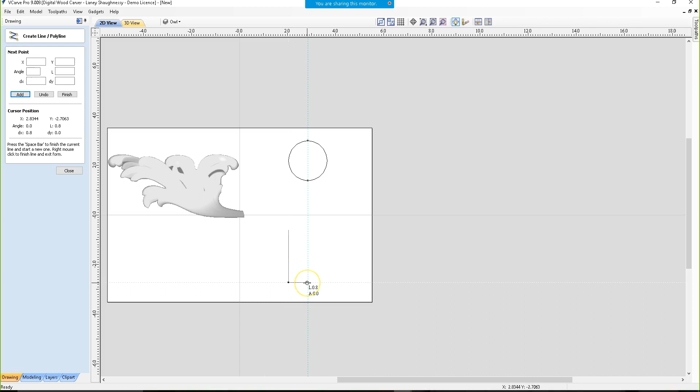And wherever I touch off on this, now I can get lines, and I can say, okay, now I want to draw my line straight in this area. Now maybe I want to come over to the center of the circle. There, I don't know if you can see it, a blue line just popped up in those two nodes on my circle up there. So that's my center point. And now that blue line is showing me where the top of my circle is.

Come over here, and now, on the edge of my circle, you'll see that line draw there. And so we have these new snapping features where I can snap to any type of vector geometry to help me draw, to tangents and stuff. So those new features are awesome.

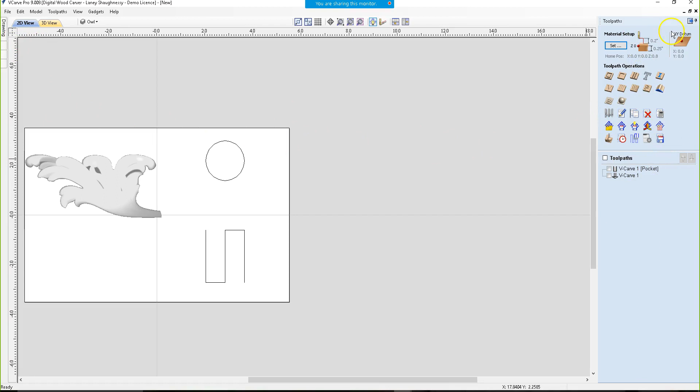The new tools... no, there's no new tools. Where's the new tools? Sorry, Aspire got some new tools. Aspire got the new revolving tool for spindle type work and making platters. A new modeling tool that's out there now. But the Vector Validator tool that's new here in Pro and Desktop and Aspire is awesome.

If we have a project where our vectors are all screwed up, let's say that they're overlapping, we can come in and do a vector validation on this, and if you look over to the right, it tells me I have one intersection right here, and that intersection is going to cause me problems with my toolpath. So it makes finding problems in complicated projects much easier. So now I know that I need to come over here and fix my intersection. So there's tools.

Yes, it's worth it. Now, you have Aspire, Debbie, so it's $400. There's a lot more options that became available in Aspire, so you can look at what's new on the Vectric website, and believe you me, it's worth it. But I'm not saying go spend money. You don't have to. Look at the tools, see if it's worth it to you. It's worth it to me, but my machine makes money, so my machine pays for itself. That $400 is not coming out of my pocket.

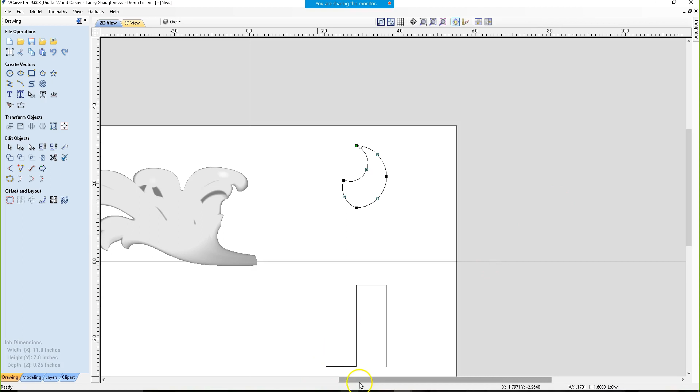If you wait for the next version, then does the price go up from the version 9? Yeah, it could cost you. I don't know what that extra charge would be. But no, it shouldn't. I think upgrade from one version to, like, if we were going from 8 to 10, it's still going to be $400 if I'm not mistaken. Debbie. Let's see here. Yeah, there's not going to be an extra fee. Sorry, I misunderstood the question. No, it should still be just the $400.